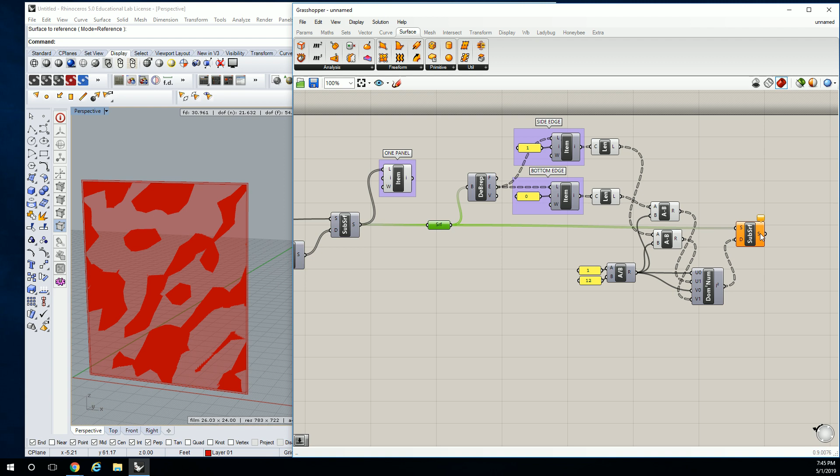But before we do that, let's make sure that this system works for multiple panels. So we'll plug in the overall system and then start taking a look at what it looks like. So let's preview that overall surface. It looks like we're still only getting the thing. Let's see, we've got 18 surfaces coming out. We have 18 groups for edges. So we need to right click and graft that system.

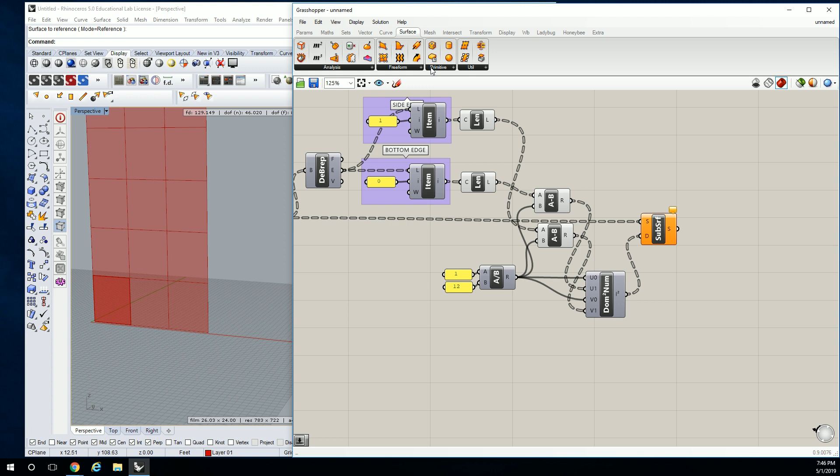So now we got that. That's good. And let's take a look at this error we're getting. Let's see. V domain is singular. U domain is singular. Let's see. So I think what's happening is, let's take a look at the data. No, it's repeating correctly. Hang on a moment. This is a little unexpected.

All right. Well, hey guys, we're gonna do this kind of a different way. So yeah, like I said before, and I've said many times, sometimes a pathway doesn't really pan out. I didn't expect this at all. I don't really know what's going on. I think it has something to do with how the data is structured in the tree. But I have another idea for how we can accomplish this, and it might actually be a little simpler. So let me put some of this stuff aside, and let's go back to that one panel.

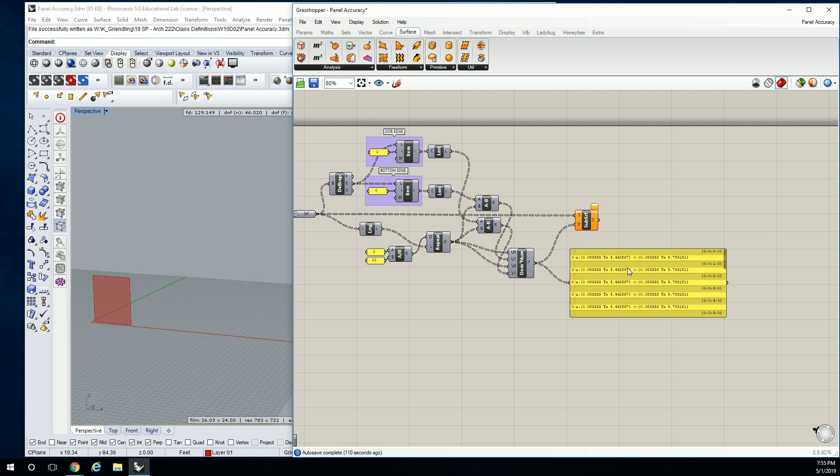So right now, this is like a pathway we tried. I'm going to keep it. Don't ever really delete anything that you've tried, so you have a record of what you have tried. But I'm going to make it red so that I know it's not really working out. All right, so back to our one panel. What I'm going to do here is I'm going to do curves, and I'm going to offset the curves, but I'm going to offset them in the direction of the center point of my panel, which actually in the 3D case might turn out a little better for me.

So let's find the tool we're going to use first. So we're going to go to transform, and we're going to use move. That's important because offset is essentially moving each curve to a new location when you're looking at it in Grasshopper. So we're going to use move, and we're going to move towards the center point of the surface. So we're going to go to surface analysis. We're going to use area to find that center point.

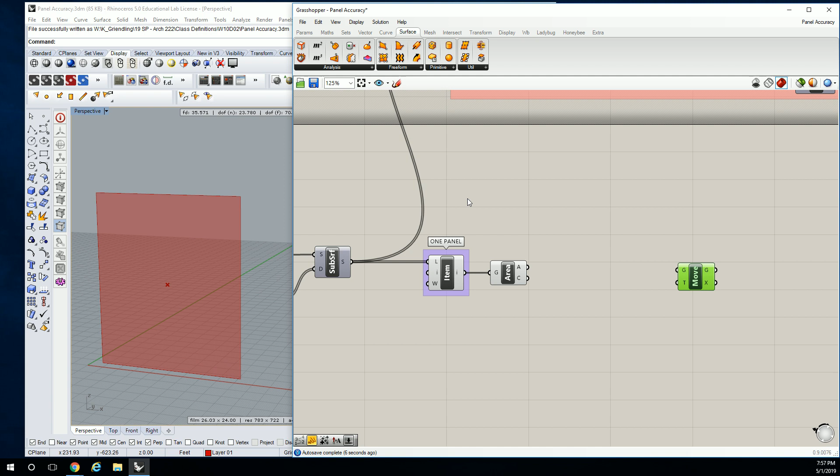Okay, so we know what we're going to move is going to be the edges of our surface. So we're going to go to surface analysis, and we're going to pull in deconstruct brep. It's going to be the edges of our surface. Oh, sorry, that's right, our one panel. Oh, sorry, I totally forgot to bring in that little surface thing, so I'm going to do that now. So that way I can just replug from the singular system to the overall system. Okay, so let's do that.

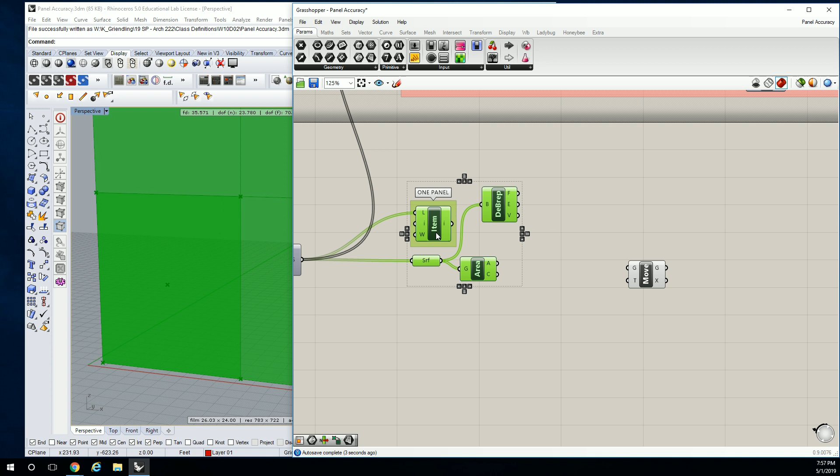So we've got the whole system. Now we're working on one panel. So we need the surface too? Yeah, it's going to help you just switching back and forth between the two. So, okay, so we know the geometry we're going to move is going to be this surface. And right now it's kind of moving it up in the z direction, a value of, I think it defaults to 10. So we're going to change that.

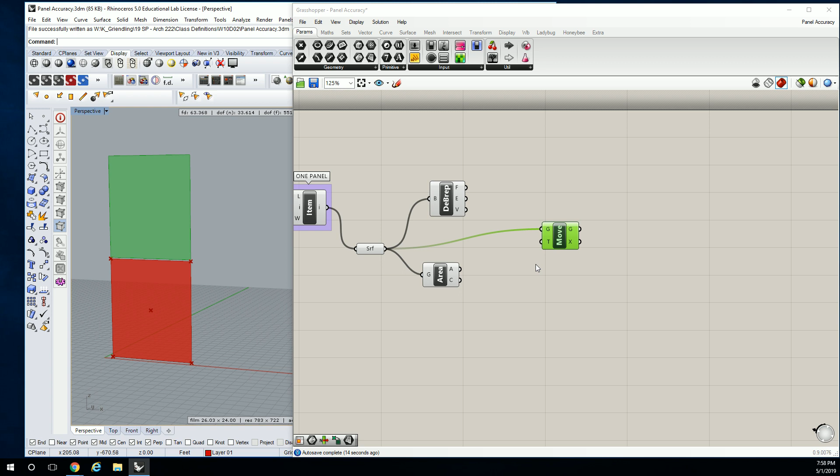We're going to change it using, under vector and vector, we're going to use amplitude. And it's been a while since you've seen this one, so I'm going to pull this one back in and give you some instructions again. Vector, vector. So amplitude, if you recall, is going to ask us for the base vector, and it's going to ask us for the numerical value. Oh, you know what? Sorry, we're not moving the surface. We're moving the edges. My bad. These edges. So the vector we're going to generate using also under vector, we're going to do vector 2-point.

Okay, and we're going to go from the midpoint of each panel edge to the midpoint of the panel. So that means I need to take the edges and find the midpoint of those edges. So I'm going to go to curve analysis and do point on curve. When I plug that in, it defaults to 0.50, which is the midpoint. And so I'm going to go from the midpoint to the center point of the surface that's here.

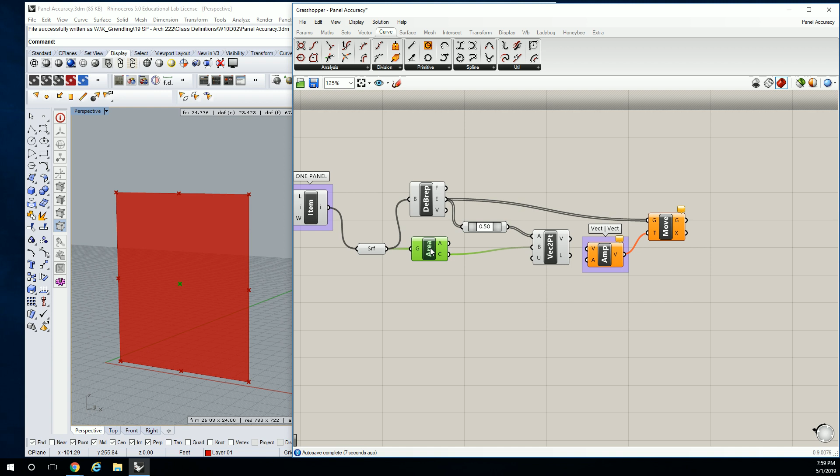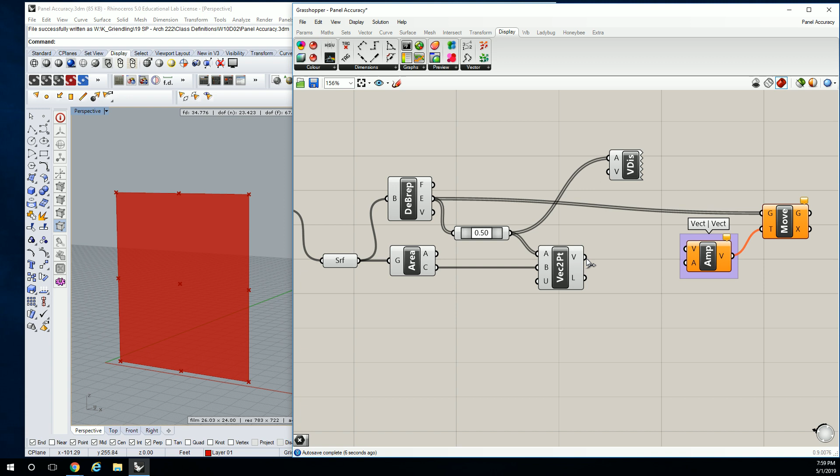And just so you guys can see what this is doing real quick, I'm going to show you the vectors. So let's go to display, vector. I'm going to go to vector display. The anchor point is going to be these edges. And this is going to be, oh, wait, hang on. Vector to preview. Hang on. That. Okay. So that's what it's doing.

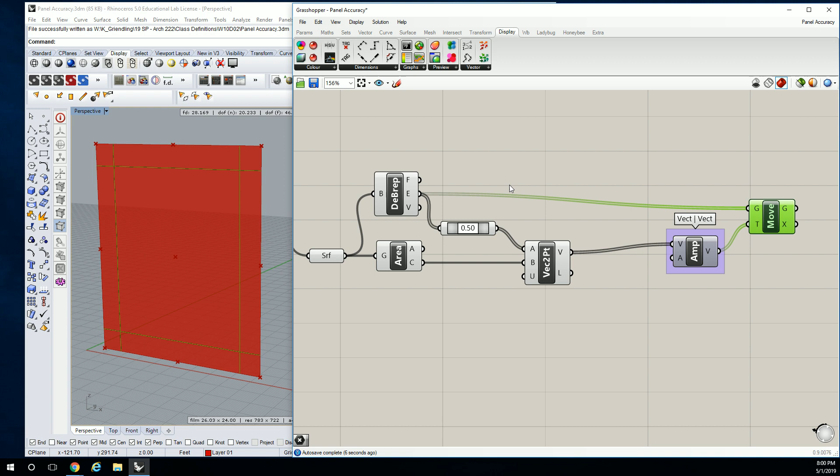It's going from the outer edge midpoint toward the center point of the surface. Okay, that's important. So now that's going to be our vector. We can see how it's already starting to offset those curves on the inside. Right? We need to set a value for what we're going to offset it. So just like we used up here to find 1 inch, in this case I'm going to do the same thing. So we're going to offset it 1 inch in. Okay? And we can reconstruct based off of this as well.

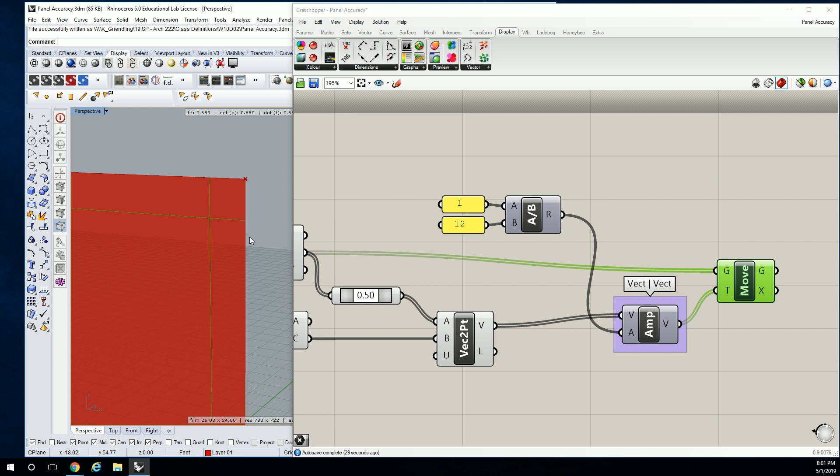There's kind of an easier way to reconstruct it. How would you guys reconstruct this? I want to first point out the problem: when you go to the corners, you have these lines overlapping. Any clever ideas? No? Okay. So rather than trying to trim those and then having data that I need to get rid of, right? You never want to have to get rid of selective data if you can avoid it. In Grasshopper, it's always better to just construct new data.

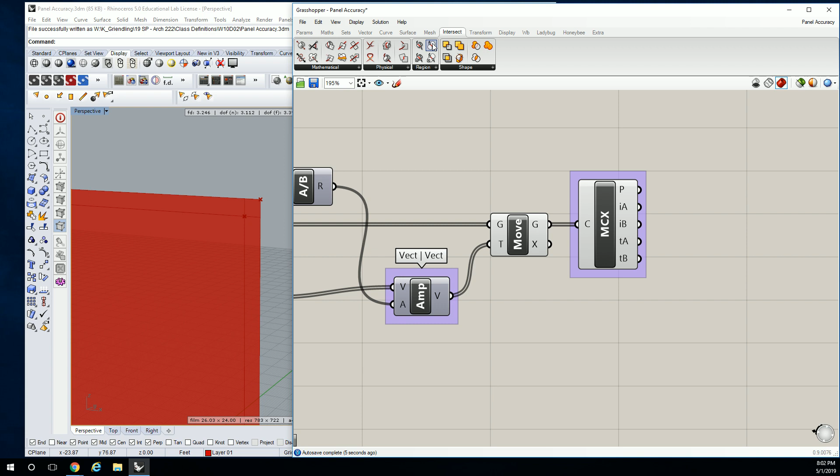So what I'm going to do is go to intersect, physical, and do curve. Okay, so this asks for your first list of curves and your second list of curves. If I plug geometry into both, it should show me the intersection, but it's not, because it's doing all 4 curves as first and all 4 curves as second. Hang on, not curve. Let's use multiple curves. Sorry. So under intersect physical, it's this one right here called multiple curves.

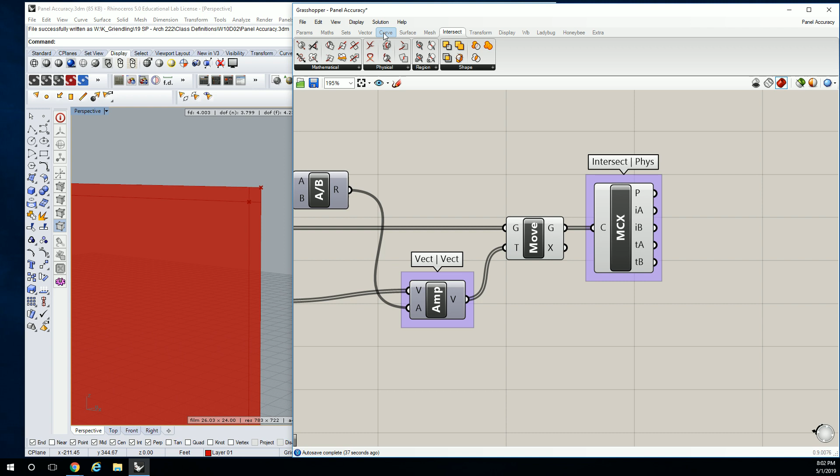So what that did for us is it found the intersection event for all 4 of these curves in its own little package. Okay, that's very important. It is in its own little package on its own surface. So we have the list of points here, and if we were to go back to surface and try to create, say, a 4-point surface, we could do that. Or we could create a surface from points. I wonder if that would work better here.

Grid of points. Boom. Number of points in U direction. Interpolate. Nah, let's not worry about that. So we're going to use index of first intersection. Trying to think down the road. Well, let's just plug it in and see what we need to change. Surface. Yes, it's a 4-point surface under surface freeform.

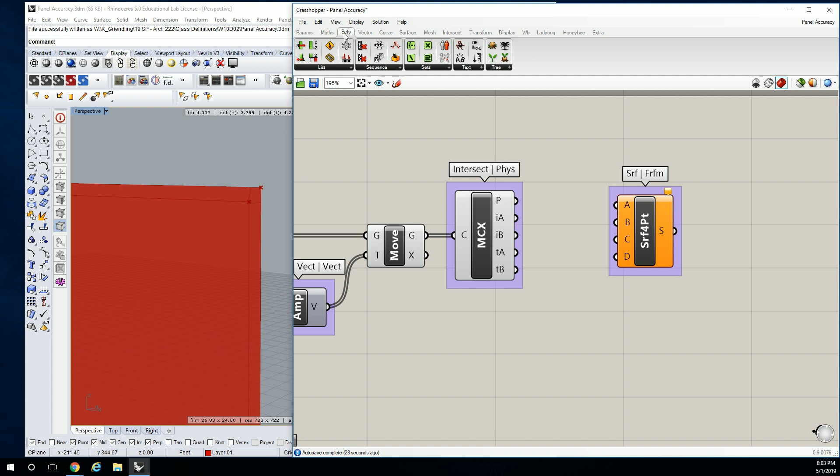So I'm going to go to tree. And actually, let's do this on the overall system so we don't screw it up. We really want to understand what's happening so we don't make mistakes here. What you're seeing is that this information is getting all screwed up because you have all these points happening around this corner. So let's graft this and take a look at the overall system.

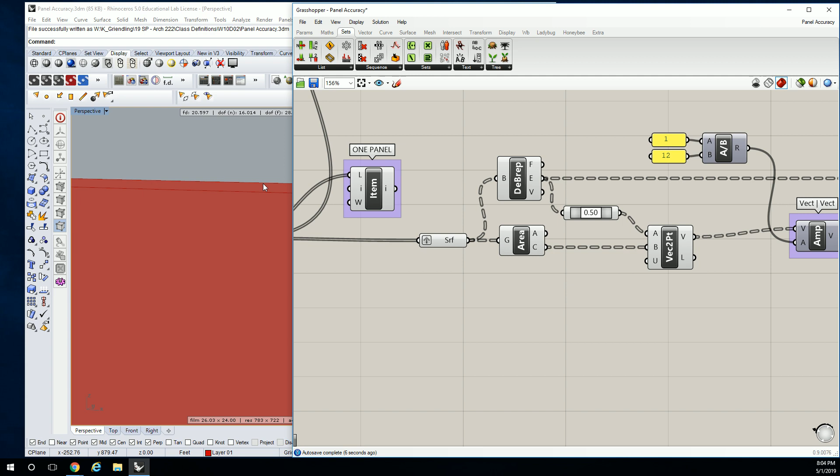It looks like for the most part it's keeping it pretty clean. All of our intersection events are happening at the corners, which is good. And then what we come to is our points are listed out like this. So we have zeros, ones, twos, and threes, right? Those are going to make up our new surfaces.

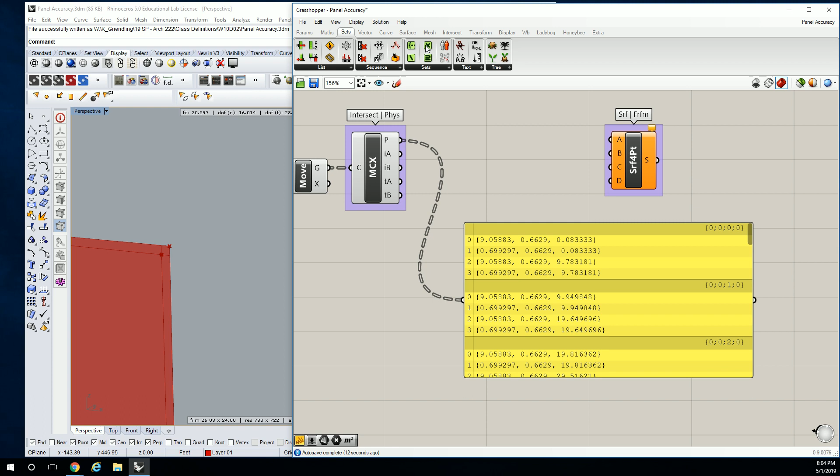However, if we were to try and do something simple with the tree function, like explode tree, we're going to get information that is still packaged in groups of 4. That's important to know. The fact that it's breaking it out into just those singular groups of 4 means that's not what we want. What we want is each index of 0 separately to be plugged into each A input for a surface.

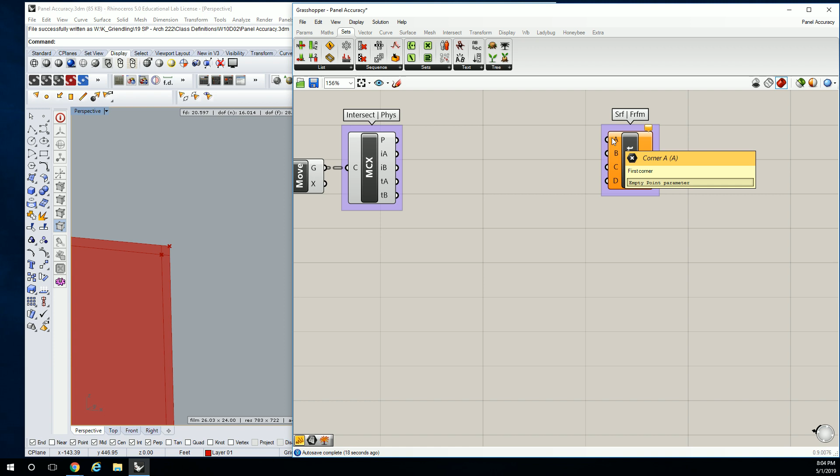So the unfortunate / fortunate part is that we have to go to list item and grab each one individually. We're only doing quadrilaterals, so that's fine. So we're going to do a list item for 0, 1, 2, and 3. We're going to plug this points list to each one and reroute that back into surface 4 point.

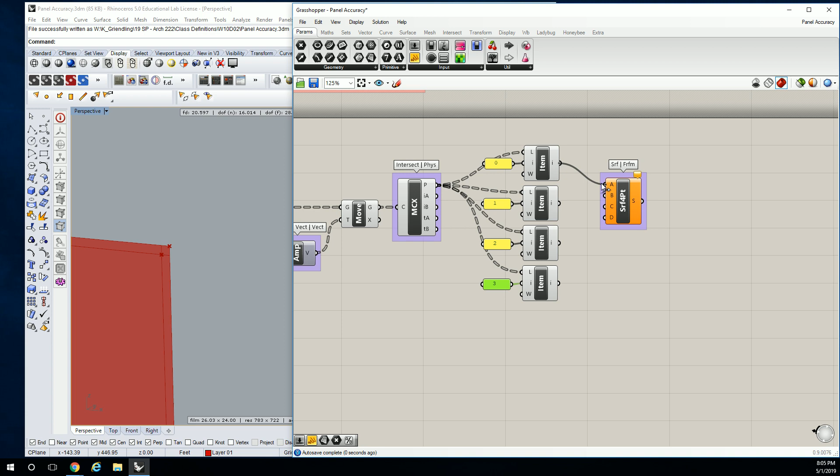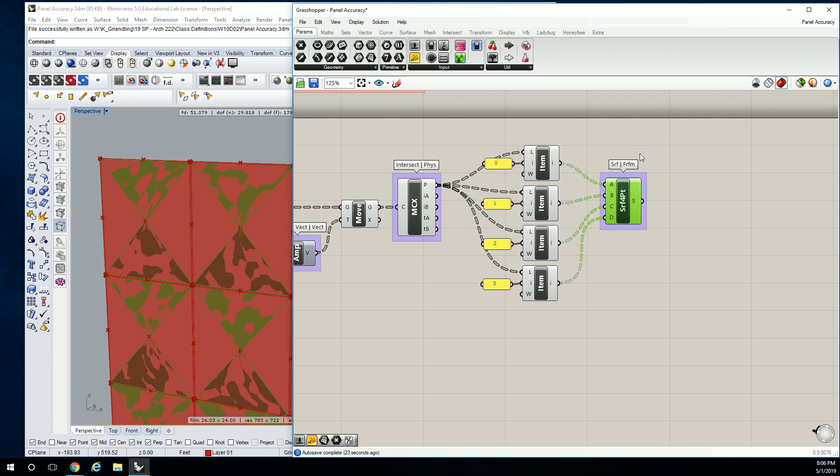And then we've just created an hourglass. So who knows why this happened? Right, because when it organizes the points for a rectangular surface, it orders them radially. So your bottom edge is a different direction than your top edge. So we actually need to take the top 2, I believe, and reverse them. There we go.

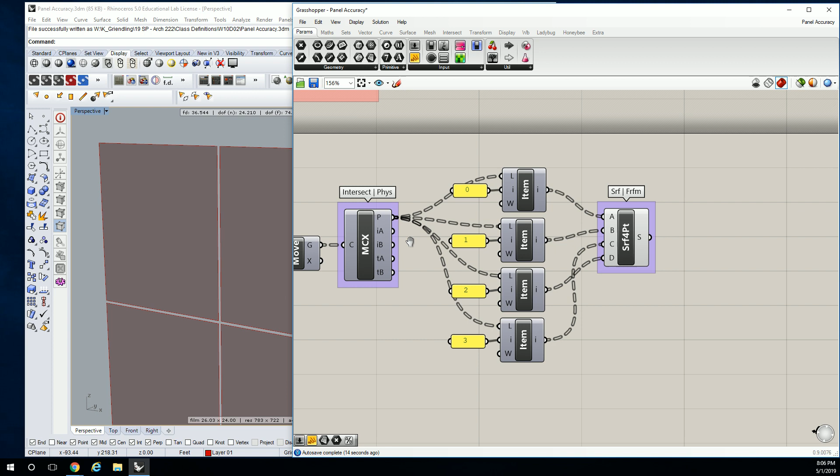Let me turn some of this extra stuff off back here. We're just taking a look at our surface now, and the original surfaces are here. What questions do you have? In terms of complexity, this wasn't really any simpler. But we did manage to get the right information with minimal effort. So we went from this to this.

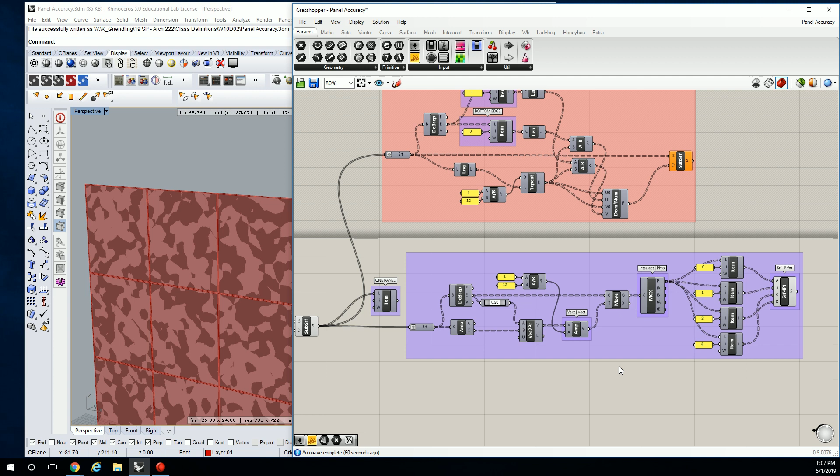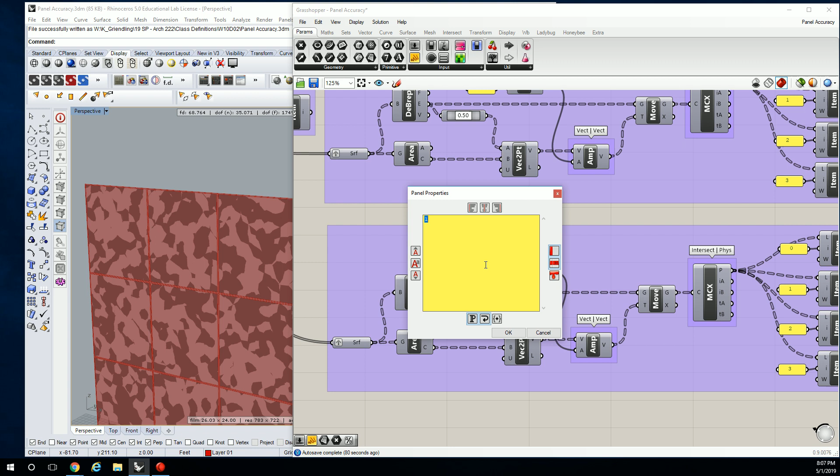Now we're going to move into the thing I was trying to do this video for, which is getting those 3-inch marks, which is basically the same thing. I don't have to do anything different. Let's just copy and paste this group, and instead of recreating a 4-point surface, we just want these 4 corner points, and I'm going to change this numerical value to 3 instead.

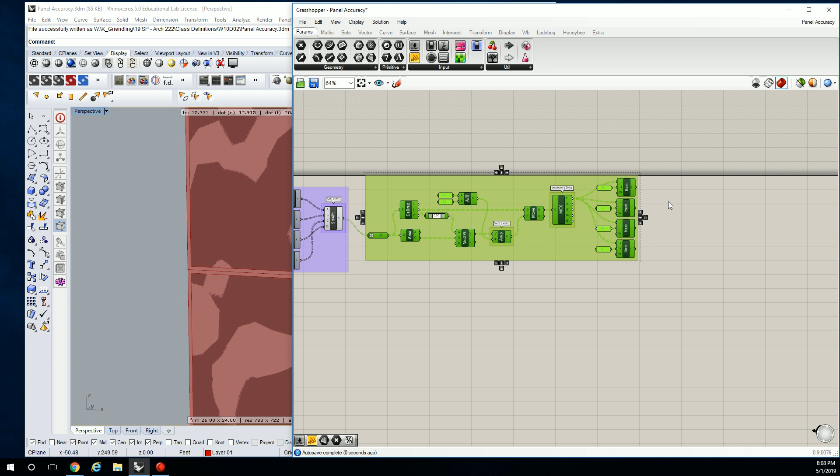The other thing is I don't want it to be on the overall surface, because if I do it on the overall surface, then that 3-inch value is not actually going to be 3 inches. It's going to be 2 inches once I input 3. So if I want 3 inches from the edge of the glazing panel, I need to start from the interior panel, which is this. Now these are exactly 3 inches from the edges. What questions do you have?

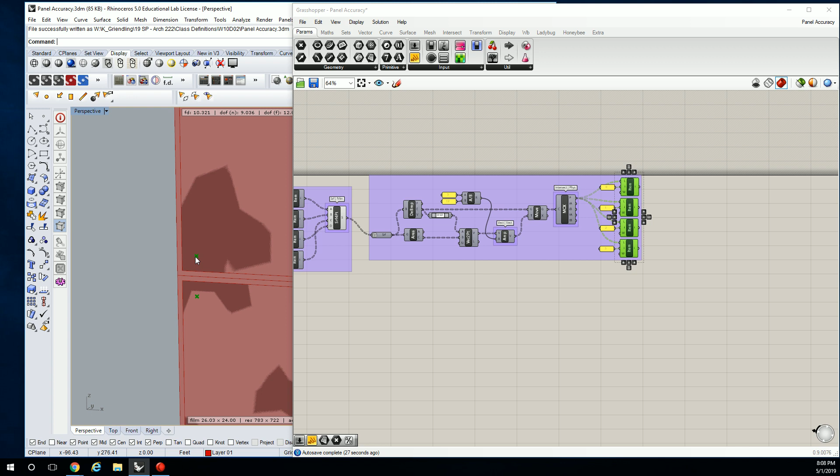Now, I want to recap something: you need to forever be thinking about clever solutions. There is no one or two ways to do anything. Basically, this will work. There's something in the data tree that I can't quite find on the spot right now. But we could sit here and do this a whole bunch of different ways all day long. It's never ending.

So be aware of that, and if you ever run into a snag, don't beat your head against a wall trying to correct that snag. Maybe there's just another way to do it, and oftentimes you might find a simpler way to do it.